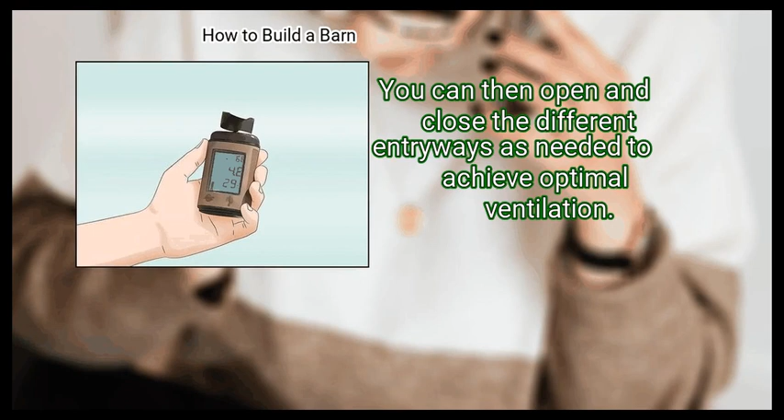Step 3: Take note of the wind patterns on your prospective building site. As you're surveying your land, pay attention to which way the wind typically blows. This will allow you to situate your barn downwind of where you live so that the scent of livestock and manure doesn't carry to your home. If the wind seems to blow equally hard in all four directions, consider placing an entrance on each side of your barn. You can then open and close the different entryways as needed to achieve optimal ventilation.

Finally, look for spots that receive sun in the morning and shade in the evening. Observe where the sun rises and sets and how the light hits trees and other objects on your property to create shady spots. With the right placement, your barn will be warm when temperatures are the lowest and remain cool as they climb, ensuring that you and your animals are comfortable all day long. If you don't have a silo, tall trees, or other shade-producing structures on your property, simply erect your barn where you think it will be the most stable.

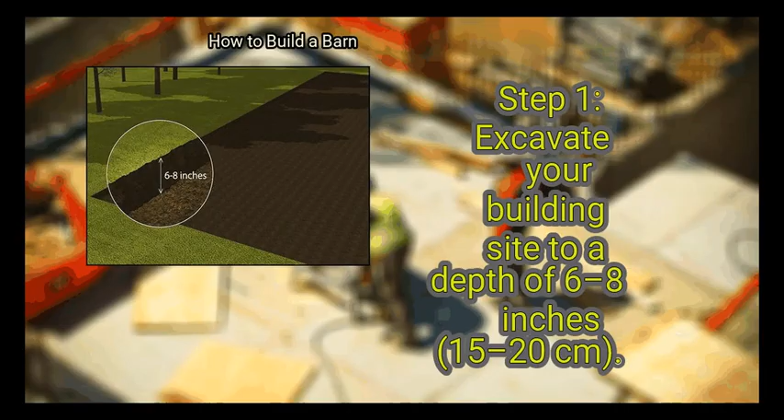Method 2: Laying the foundation. First, excavate your building site to a depth of 6 to 8 inches, or 15 to 20 centimeters. Clear out a large square or rectangular pit matching the planned dimensions of your barn by going over it with an excavator, backhoe, or bulldozer. Make sure the excavated area is as smooth and level as possible prior to pouring your foundation.

Many power equipment companies rent out excavators, backhoes, and other excavation tools on a daily, weekly, or monthly basis. Run a quick search for your equipment of choice plus the name of your town or city to find a renter in your area. Be sure to save the topsoil you remove, as it can come in handy for building up uneven areas or completing future landscaping projects.

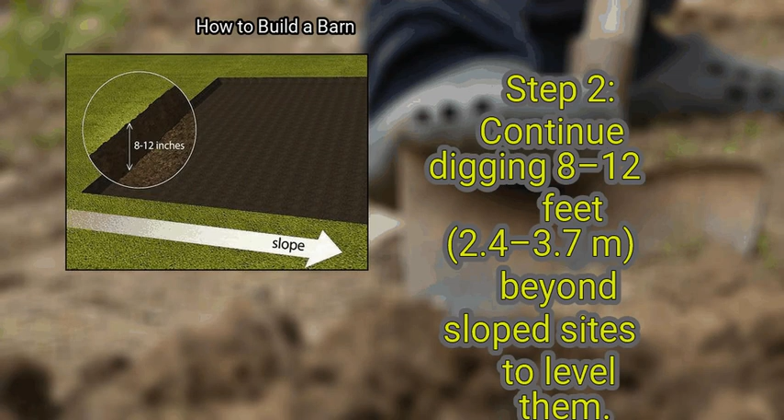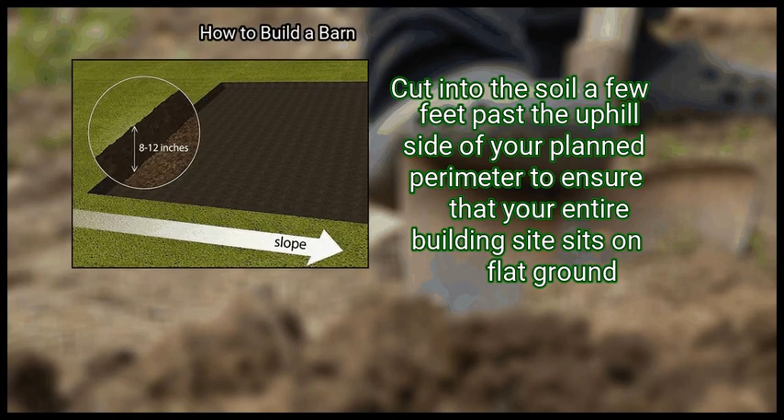Step 2: Continue digging 8 to 12 feet, or 2.4 to 3.7 meters, beyond sloped sites to level them. If you are planning on building your barn into a hillside, you'll need to do some additional excavating to even out the terrain you've selected. Cut into the soil a few feet past the uphill side of your planned perimeter to ensure that your entire building site sits on flat ground. Be sure to provide a consistent amount of space all the way around.

For a barn that's 30 feet (9.1 meters) by 40 feet (12 meters), your excavated area would need to be 38 to 42 feet (12 to 13 meters) by 48 to 52 feet (15 to 16 meters).

If you don't have enough space to extend your dig site, another option is to build a retaining wall along the back edge of the foundation's perimeter to stabilize the adjacent soil and halt runoff.

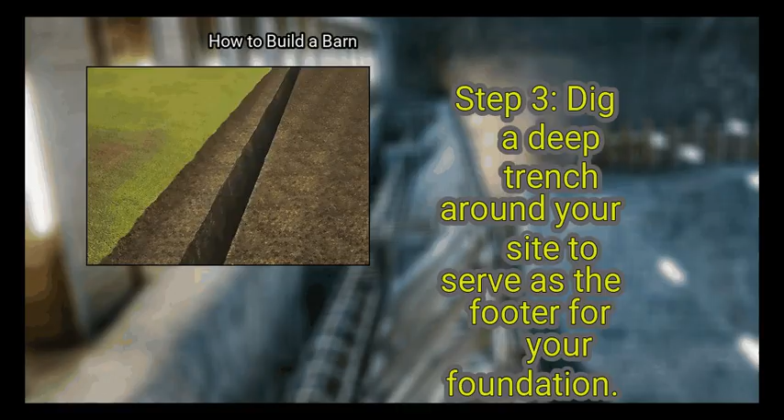Step 3: Dig a deep trench around your site to serve as the footer for your foundation. The footer is the lowermost part of the foundation, designed to anchor it in the ground and provide support for the surrounding concrete walls. Use your excavator to open up a long, linear channel spanning the outer perimeter of the excavated area. Keep in mind that your footer must meet the minimum depth and width requirements specified in your local building codes, which can vary depending on the regional climate.

It's not necessary to dig the foundation for a barn quite as deep as you would for a house or similar structure, since the walls and roof are all that it will be holding up.

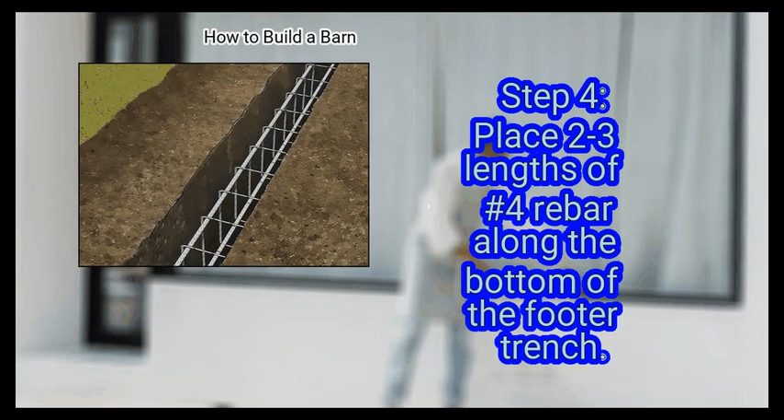Step 4: Place 2 to 3 lengths of number 4 rebar along the bottom of the footer trench. Run the metal rod straight down the center of the floor on all 4 sides of the trench, spacing them so that they lie 3 to 6 inches (7.6 to 15.2 centimeters) apart and overlap where they meet at each corner.

The rebar will serve as a preliminary layer of reinforcement for the concrete foundation you'll be pouring later on. Use a circular saw equipped with a ferrous metal cutting blade to trim your rebar to the appropriate size.

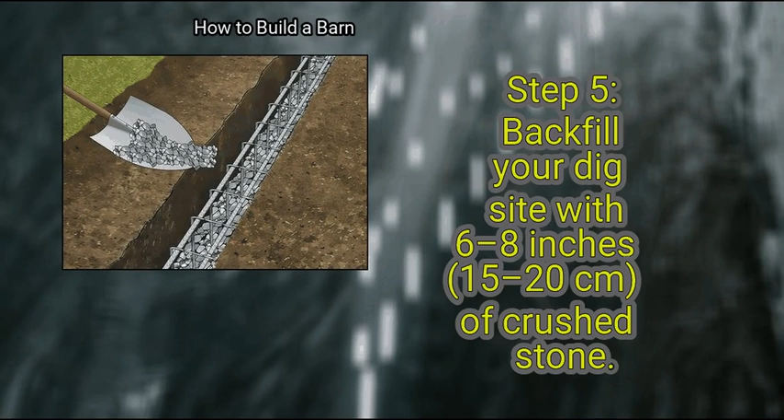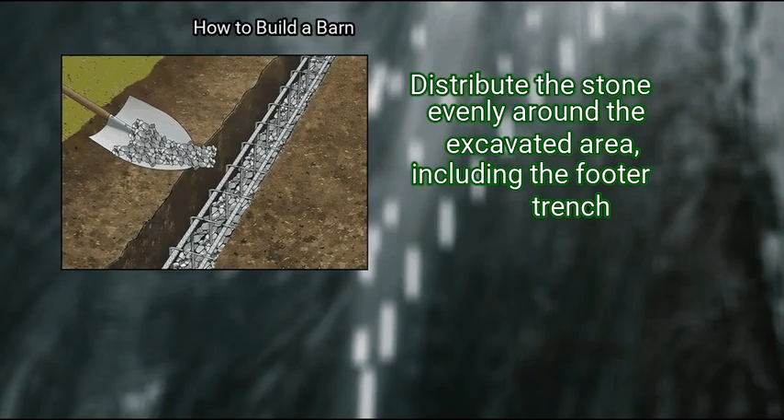Step 5: Backfill your dig site with 6 to 8 inches (15 to 20 centimeters) of crushed stone. You can purchase bags of machine crushed stone in various sizes at your local home improvement center. Distribute the stone evenly around the excavated area, including the footer trench. Reposition the stone as needed with a shovel or gravel rake until it lies level, with no noticeable mounds or depressions.

Any type of stone sized number 57 or larger will make an ideal substrate choice for structures like barns and large sheds. To guarantee maximum stability, it's important that all building sites be backfilled with stone, whether they're located on a slope or not. Step 6: Pour the concrete foundation.

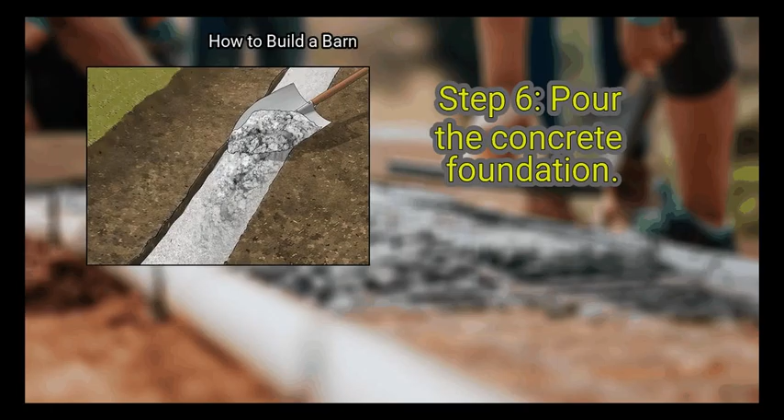First, fill the footer trench with 6 to 8 inches (15 to 20 centimeters) of concrete and let it set for 2 to 3 days.

Then, install vertical rebar at regular increments around the perimeter and pour a second round of concrete to complete the below-ground foundation wall, again allotting 2 to 3 days of setting time.

Finally, install a grid of wire mesh over the substrate on your building site and pour a 5 to 6 inch (13 to 15 centimeter) layer of concrete for the slab floor.

Alternatively, you can stack 8 to 10 inch (20 to 25 centimeter) cement blocks in the space between the concrete footer and the top of your substrate, and pour the concrete for the slab floor between the uppermost layer of blocks. Once you've finished pouring the concrete for your foundation, allow it to set for another 2 to 3 days, or until it's had time to cure completely.

Or until it's had time to cure completely.

Concrete floors are stronger, more durable, and easier to clean and maintain than bare dirt or gravel floors, but they can be hard on your animals' hooves.

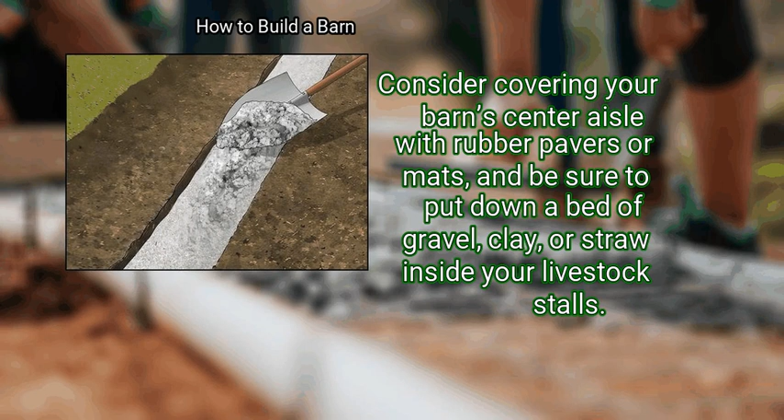Consider covering your barn's center aisle with rubber pavers or mats, and be sure to put down a bed of gravel, clay, or straw inside your livestock stalls.

Method 3: Assembling the structure.

First, construct a standard stick wall frame out of 2x6 studs. Traditional barns are typically stick framed, the same way that most homes are.

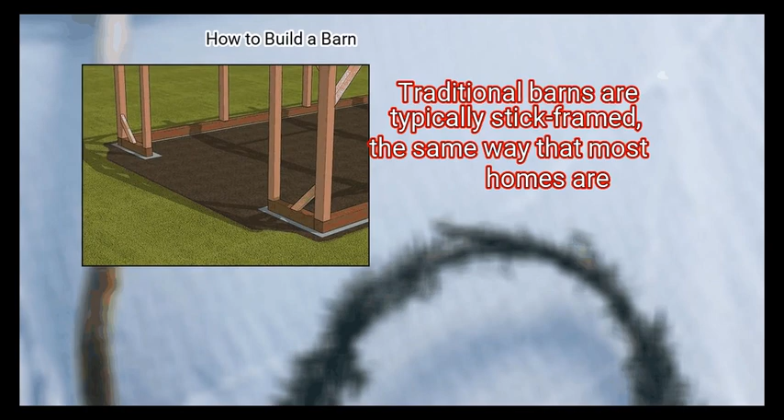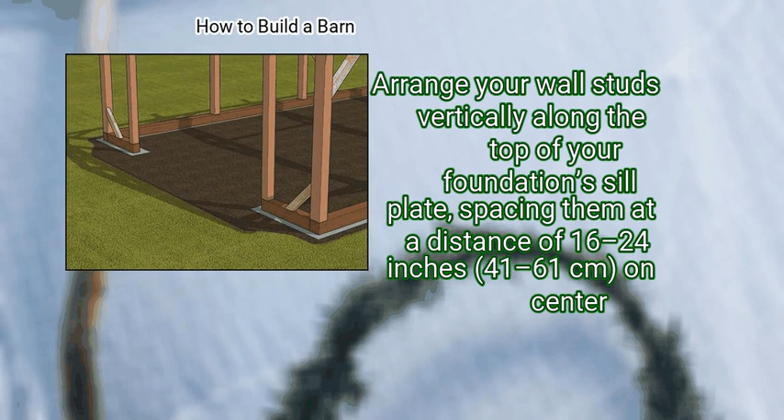Arrange your wall studs vertically along the top of your foundation's sill plate, spacing them at a distance of 16 to 24 inches (41 to 61 centimeters) on center. Secure each stud by driving 2 nails down through the bottom of the interior edge and into the sill plate.

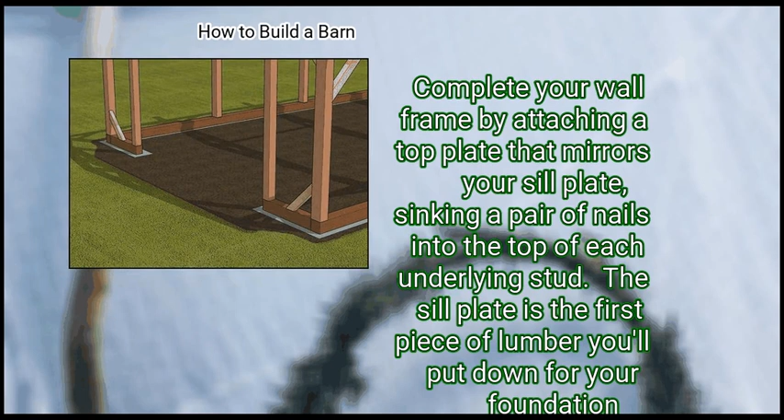Complete your wall frame by attaching a top plate that mirrors your sill plate, sinking a pair of nails into the top of each underlying stud. The sill plate is the first piece of lumber you'll put down for your foundation.

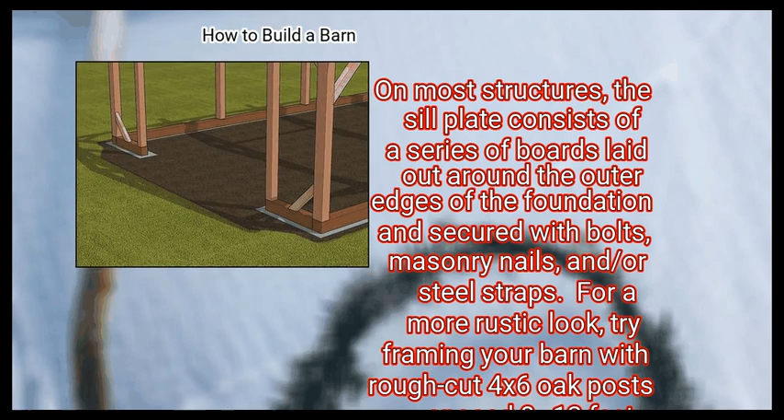On most structures, the sill plate consists of a series of boards laid out around the outer edges of the foundation and secured with bolts, masonry nails, and/or steel straps.

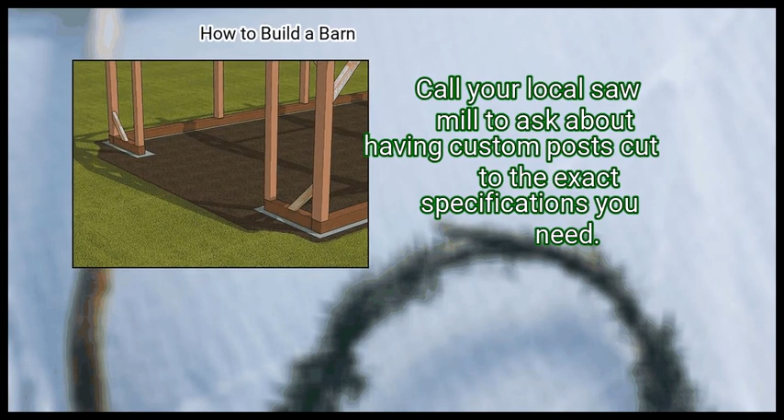For a more rustic look, try framing your barn with rough-cut 4x6 oak posts spaced 8 to 12 feet, or 2.4 to 3.7 meters, apart on center. Call your local sawmill to ask about having custom posts cut to the exact specifications you need.

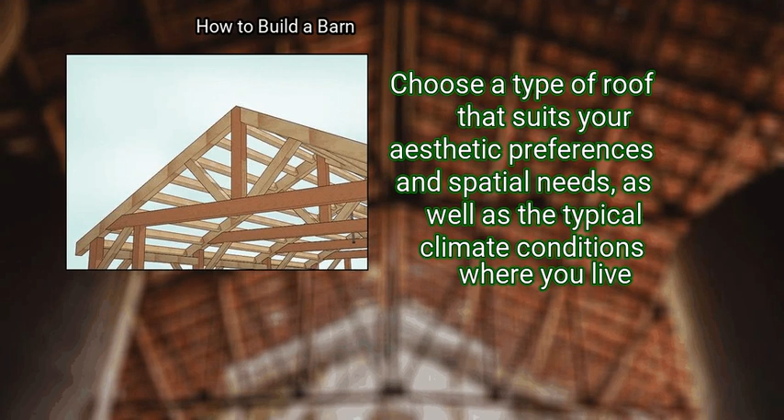Step 2: Build a series of trusses. Choose a type of roof that suits your aesthetic preferences and spatial needs, as well as the typical climate conditions where you live. Barns in high rainfall areas, for instance, may benefit from steeply sloped roofs. Once you've decided on a particular style, measure the roof and use the dimensions to plan the layout of your trusses, which you can then cut and fasten assembly-line style.

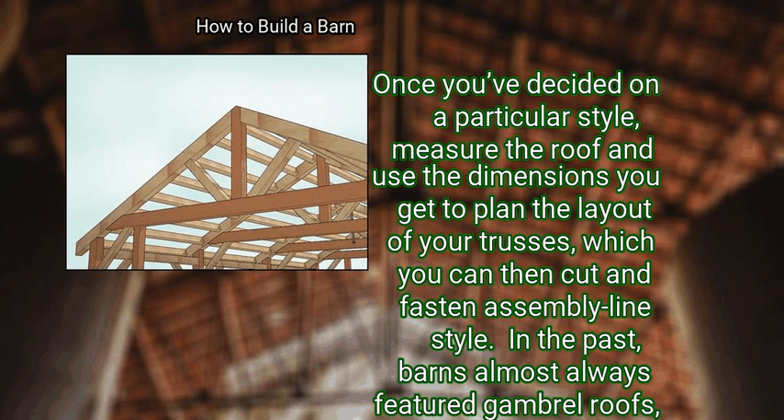In the past, barns almost always featured gambrel roofs, which consist of four flat planes that come together in a point at the center. If you prefer, you could also go with a simpler style for your barn, such as a gable, skillion, hip, or even a flat roof.

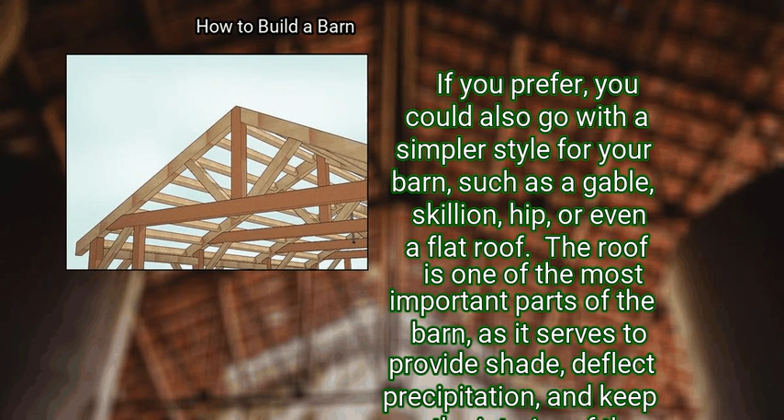The roof is one of the most important parts of the barn, as it serves to provide shade, deflect precipitation, and keep the interior of the structure covered. If you're not confident in your ability to build a sturdy, watertight roof yourself, it's best to hire a contractor to come in and make sure the job gets done right.

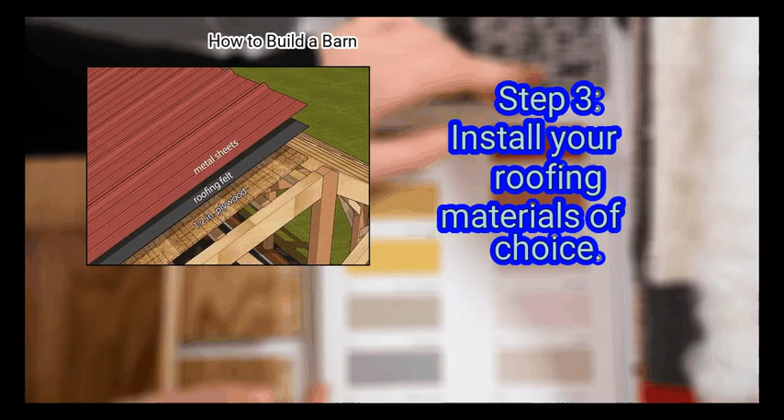Step 3: Install your roofing materials of choice. Start by cutting sheets of 1/2-inch, or 1.3 centimeter, plywood into sections and nailing them into place on your roof trusses. Roll out overlapping sheets of roofing felt and nail or staple them along the edges to secure them.

From there, you can put down shingles or standing seam metal sheets, which are the two most common types of materials used to roof traditional barns. Roofing felt acts as a buffer to protect your roof's sheathing from damage, block out moisture, and insulate against heat and cold. Plan on putting down a layer of roofing felt no matter what roofing materials you ultimately go with.

Corrugated metal roof panels can provide a simple and long-lasting option if you have a little more money to spend. They're easy to install, environmentally friendly, and capable of withstanding extreme temperatures, sun exposure, and precipitation for up to 70 years.

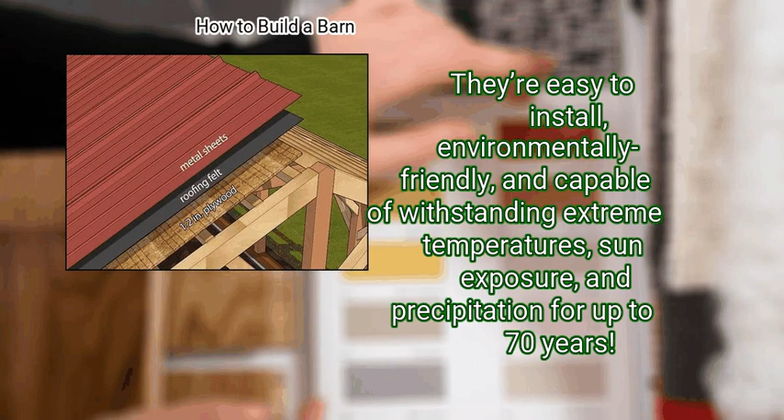Step 4: Cover your barn's frame with board and batten siding. Board and batten siding is a type of pre-cut wood siding responsible for giving old-fashioned barns their distinctive appearance. Purchase your siding in individual panels pre-cut to the desired size for ease of installation.

Fasten the panels to the exterior walls of the barn by driving nails into both ends of the top and bottom. It may be necessary to trim the final board on each wall to comfortably fit the remaining space.

If you prefer the DIY approach, you can also create your own board and batten style siding by nailing 2x10 boards onto your wall studs with 2x4 boards positioned perpendicularly in between.

Finally, mount a set of large sliding doors for the main entrance. Last but not least, you'll need a way to get yourself and your livestock in and out of the barn. Barn doors are available in both swinging and sliding styles, though sliding doors are far more common.

To install sliding barn doors, mount a narrow backing board over the entrance cutout and screw on the metal track hardware included with your door's installation kit. Attach the roller straps to either side of each door's upper edge, then carefully lift the doors and set them down in the track, making sure the wheels are aligned properly.

Barn doors can be quite heavy, and may be too cumbersome to manage by yourself. Ask someone to give you a hand hoisting the doors up onto their tracks once you're done installing the mounting hardware. Don't forget to measure the wall you want to put your door in so you'll know what size doors to buy and how far they'll be able to open in either direction. This will be especially important if you'll be herding large animals through the entrance.